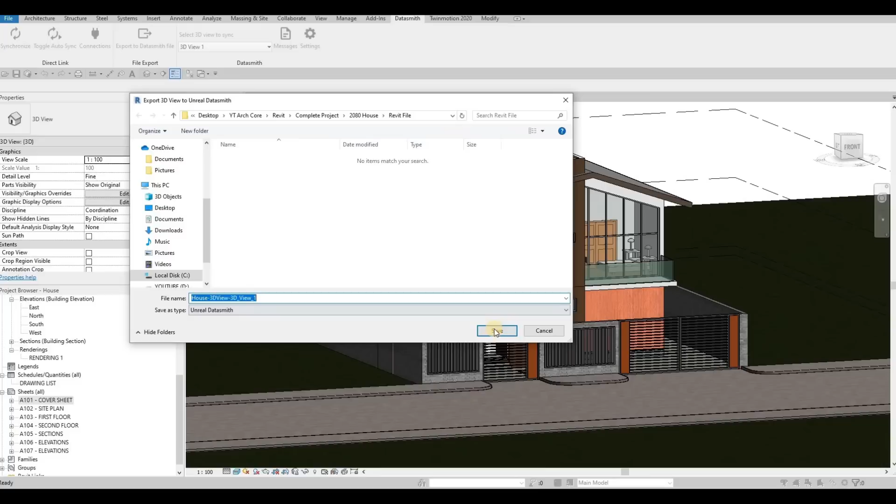Once you do, we're going to go to the Twinmotion program. I already have it open, so I don't need to wait for it, and I'll just close this one. What I do is delete the starting cylinder and the sphere, and leave the starting ground, but delete everything else.

After that, we go to import, and we need to go to the location where we saved our Datasmith file. So I went here, did Control-C, then went to import, selected the plus sign, left it in geometry, clicked open, did Control-V on the file name, went to the correct location, clicked open, and then clicked import afterward.

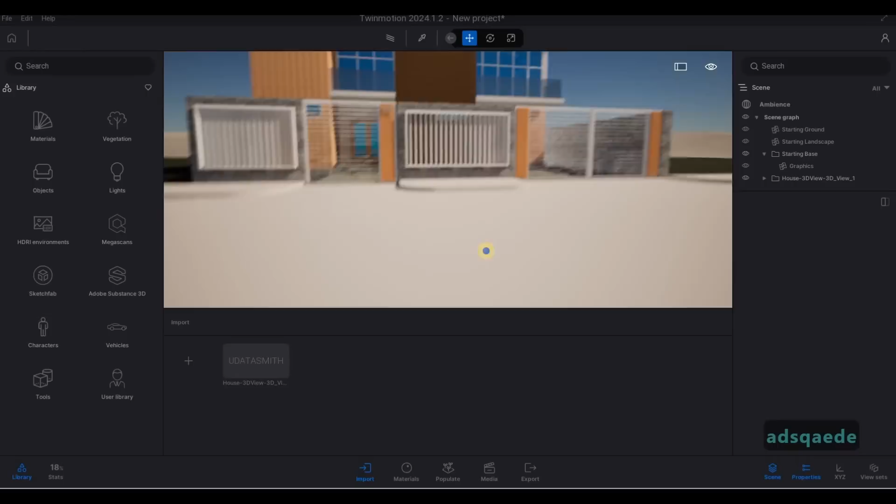It will import our model, and as you can see, just press OK. Let's see how this one looks. We want to make sure nothing is overlapping and everything is showing up properly, especially the base. For example, if it's above, it will start blinking because it's overlapping this. So we're just going to undo this and leave it like this.

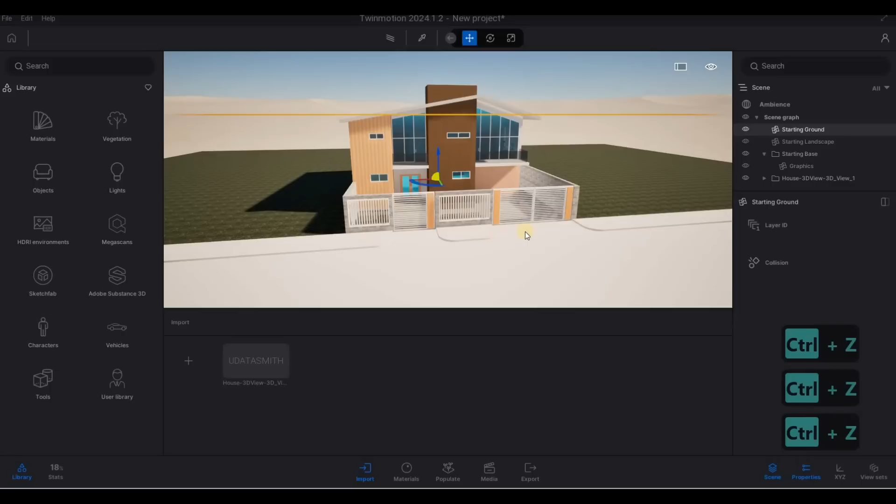So we got this one done, and we have to save it first so we already have it saved. Make sure to sign in as well. I'm already signed in, so that's good. I just need to save as, save it to the proper location, and I'm going to put it in a folder called HOUSE, all caps. Click save, and since you're already signed in, we'll be able to use Sketchfab, Megascans, and all that already.

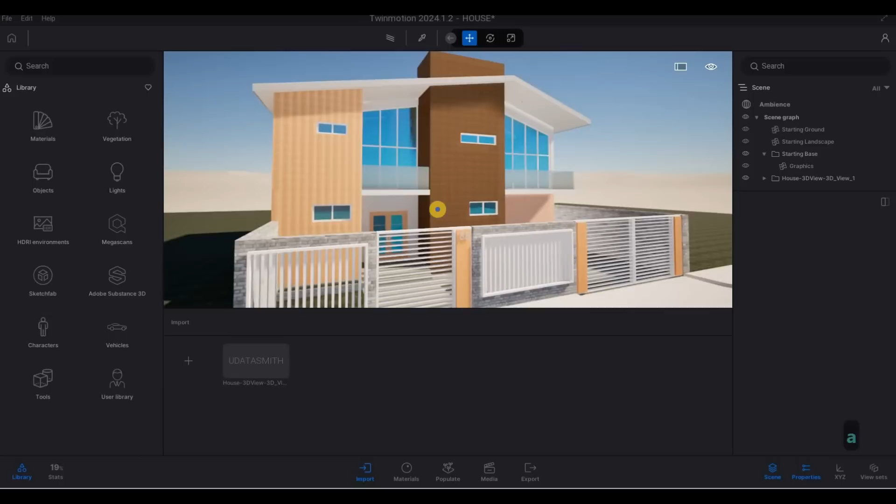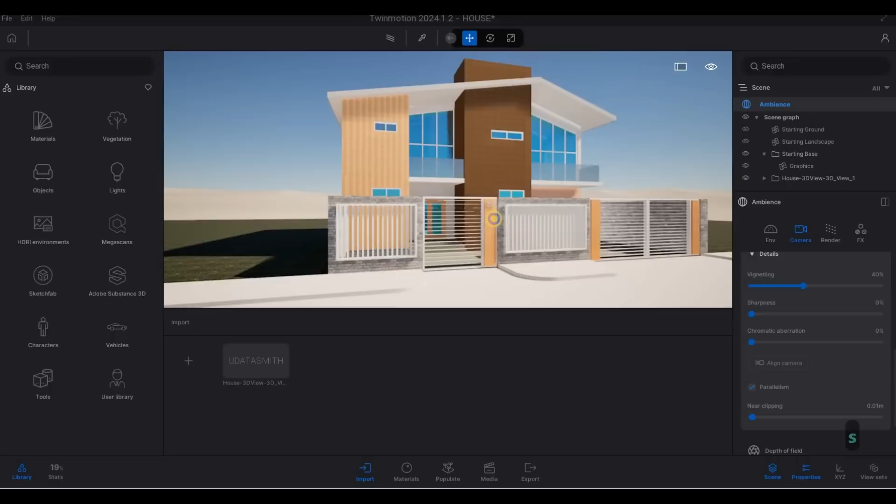Now click on ambience, then go to camera. This is very important that we do this. Go to local exposure, and look for details, then we need to check this parallelism. Click here so we're always vertically aligned and not tilting, and then everything looks much better.

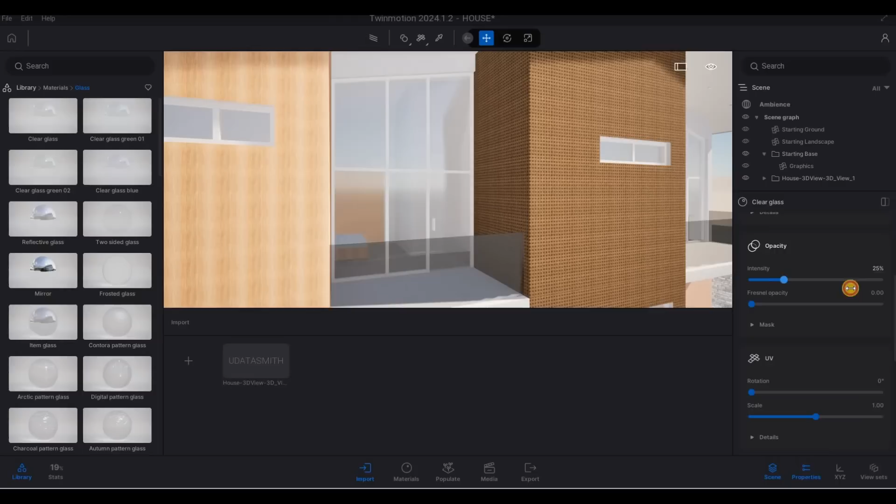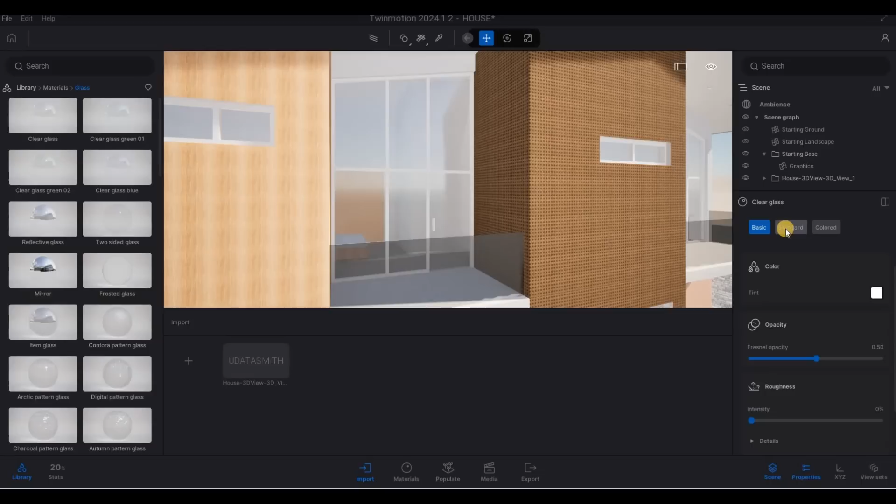Now we can add in materials, and one thing I do first is the clear glass. I'm going to set this one as clear glass, basically increasing the opacity. I'll put this one around maybe 25, and this one around 0.50. That's good right there. Then the tint, just basic or standard, either way works. So standard, and I'm going to make this one still visible there, but we'll change that later once we set up the rendering.

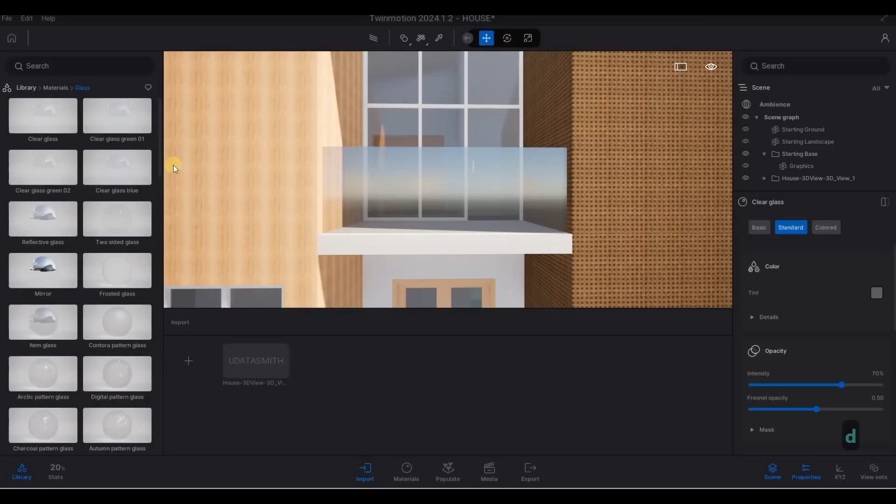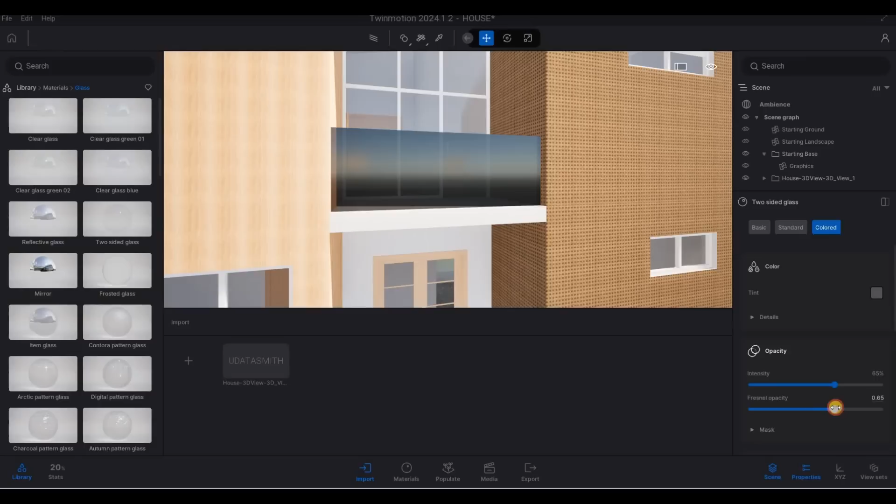Then also go to ambience. Actually, for this one, we need to set the clear glass again. I'm going to make this one two-sided, and make it a little bit colored because we need a separation of intensity for this one. So I'm going to use this one somewhat different, so at least there's some separation of lightness there.

After that, go to materials, and the stone that I'm going to use here is my favorite one, this one, and I'm going to increase the scale.

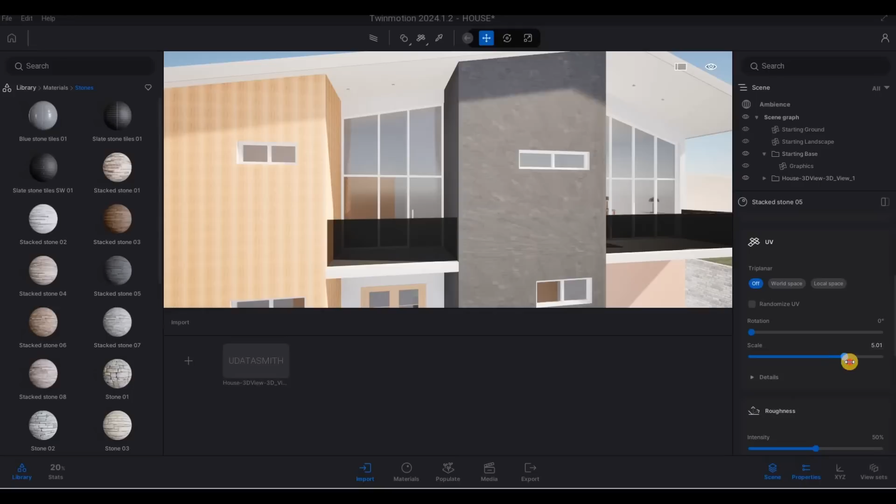So I'm happy with that, I'm just gonna leave it like that for now. If I want to change it, I'll change it later on, but for now that looks much better.

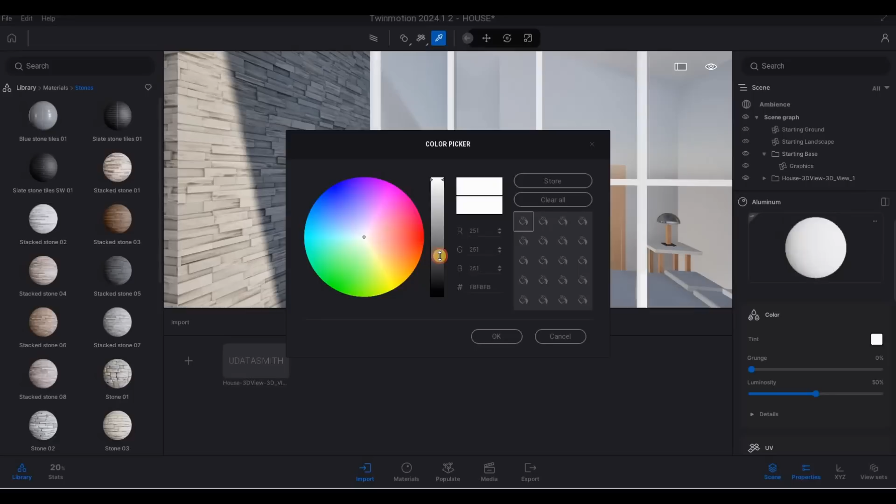For the mullion, I'm going to pick material and select that material right there. It's already aluminum, and what I'm gonna do is change it to black. You want to increase the metalness if it's not already high. I'm gonna put it at 80. So that's good right there.

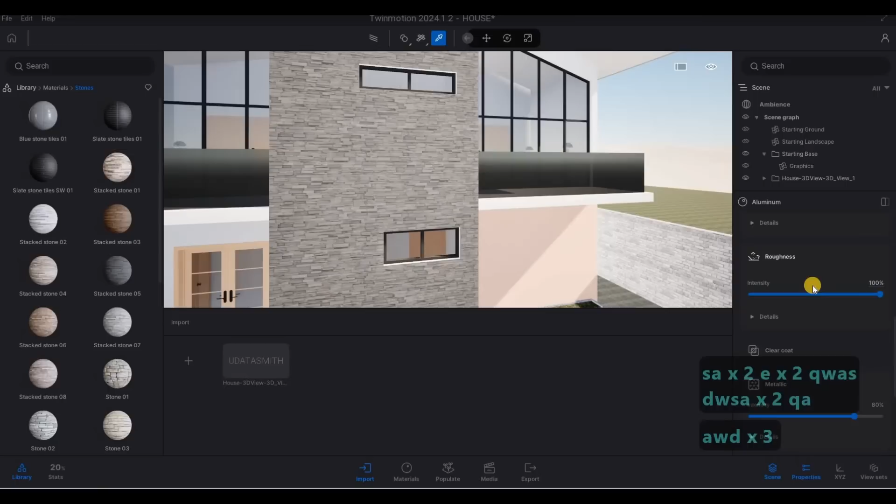Black. And then the next thing we're gonna do is set maybe the materials for this one.

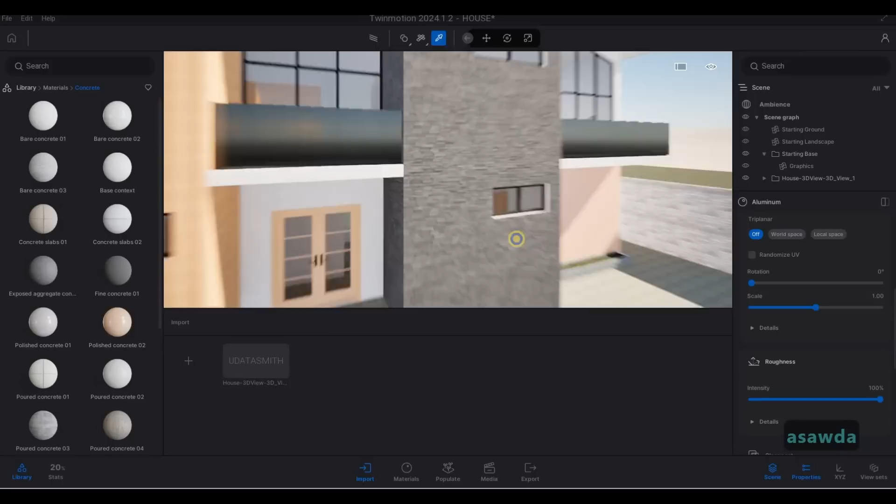So go to materials. For the concrete, it's either I'm gonna leave this one white, or set it like that. Either way I'm gonna change that, but I forgot I'm going to put this one as aluminum as well, so it's consistent with color.

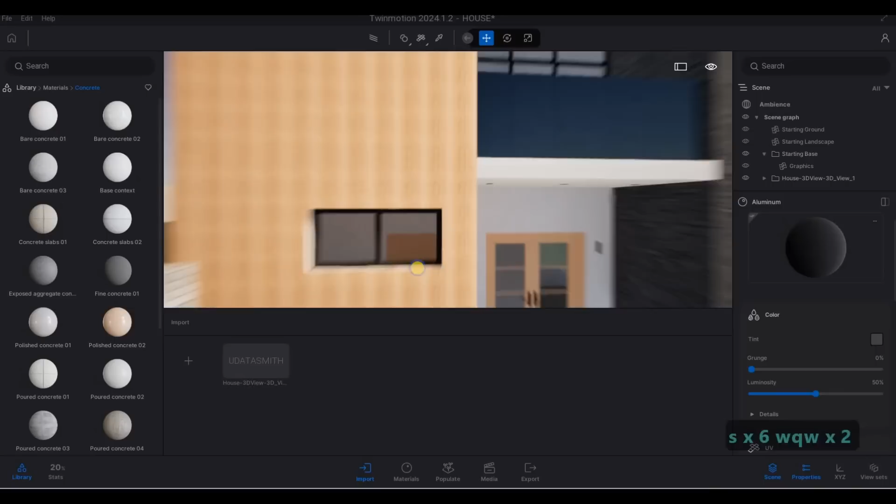And then this one as well, the casing of the light there. And then why not put this one right here, and then aluminum here as well for the number. So I'm good with that.

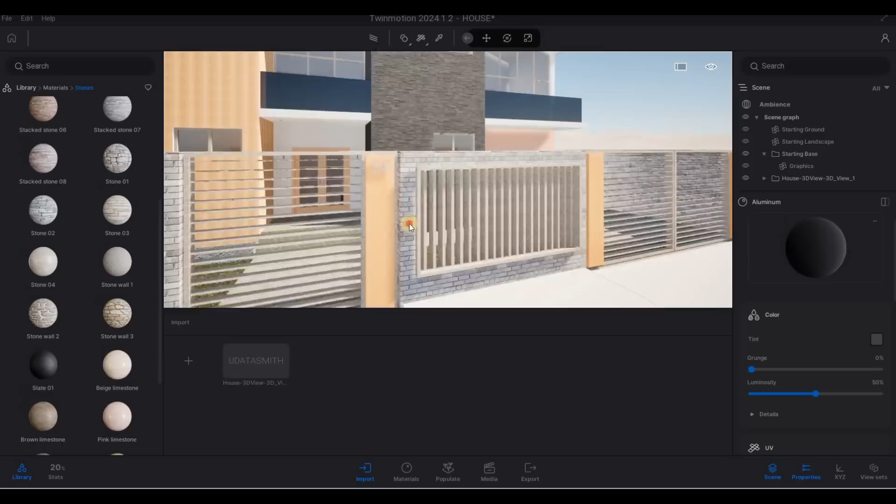I want to change the border wall to something stone again. I'm gonna use this, and then increase the scale.

Actually, this stone looks much better as well. It's better here as well. So either way, we can add that one or here.

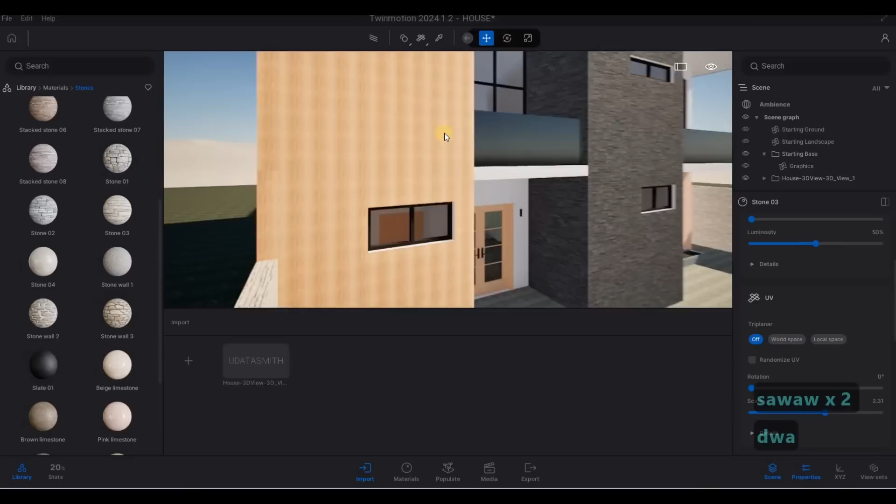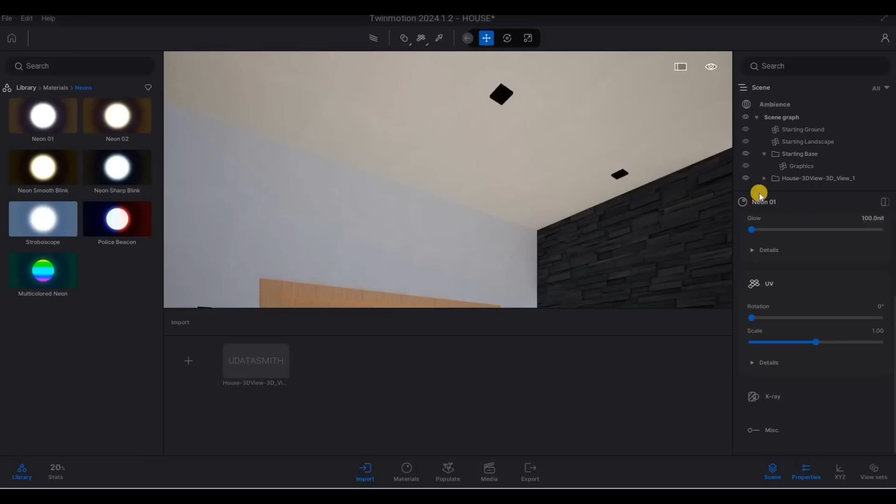And then it's either we put all, we're just gonna leave this one white, and then I want the neon now to show. So here I'm going to set this one up, and I want it to glow, and it's not glowing. There's a reason for that.

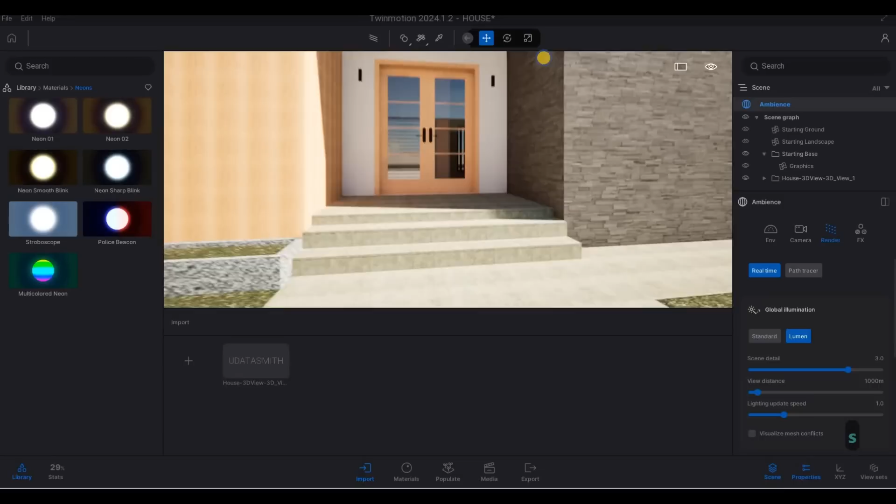So what I want to do is go to ambient, go to rendering. I'm gonna use Lumen, and then of course path tracer later on. And then here we need the Lumen to glow.

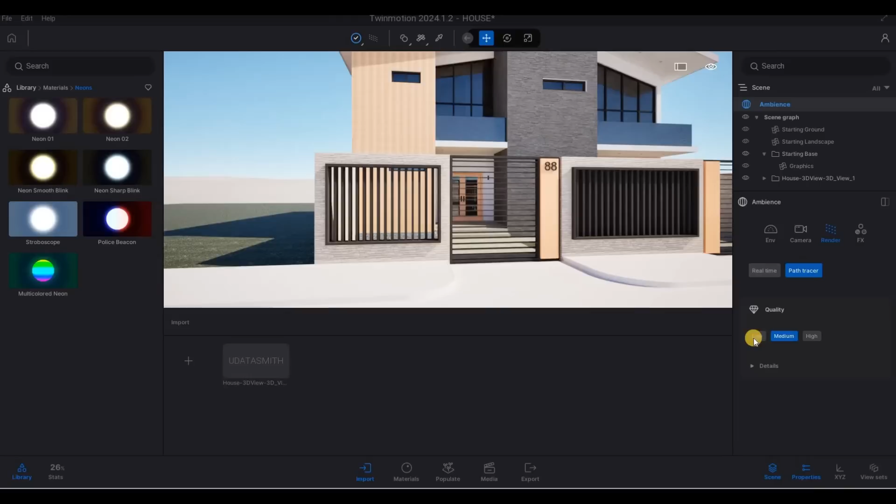So I'm just going to leave this one around like that, and once we're rendering it, we're gonna see how it looks, if it's glowing too much or too low. So depending on that, we're gonna put the path tracer low for now, so that once we render, we'll be able to see.

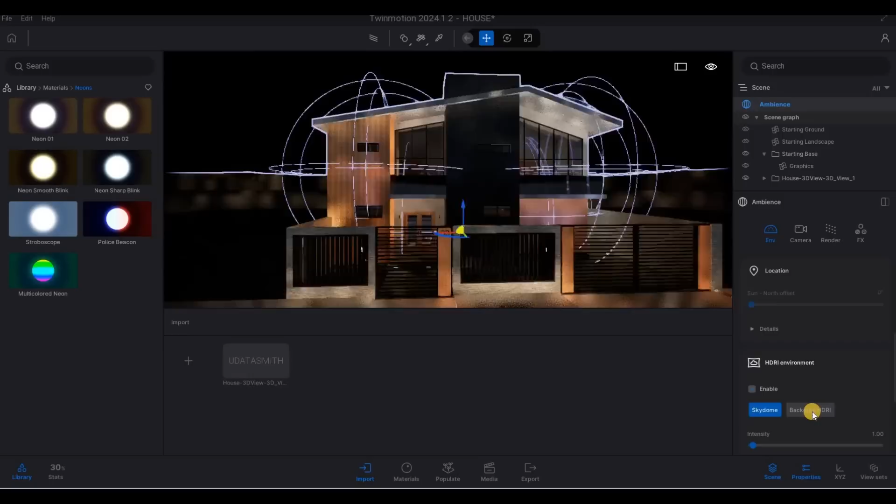And then why not go here, go to ambient again, and click on the environment, because we're going to use HDRI. Click enable and then backdrop HDRI. And then here we can change the HDRI and choose different ones. So ambient, environment, and we could drop it here once selected.

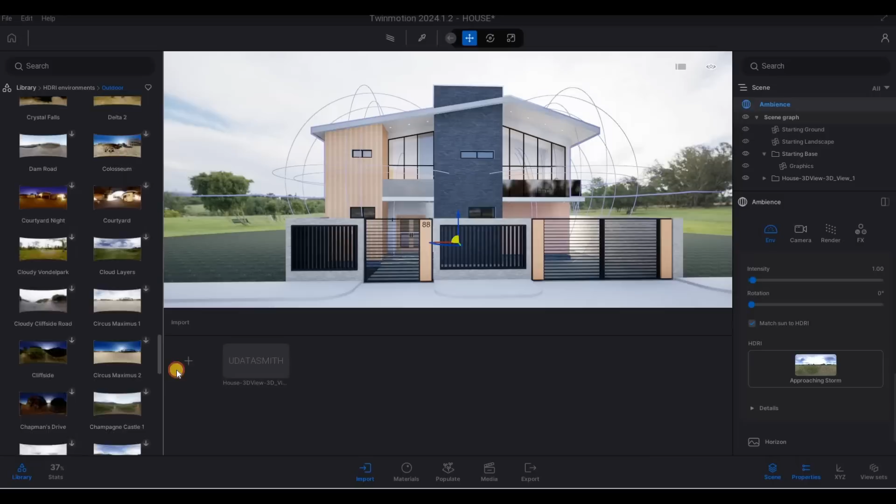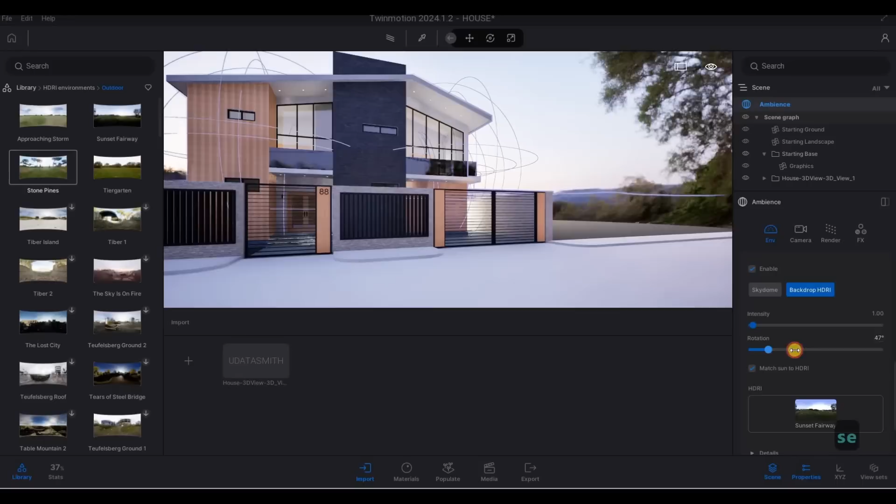I'm looking for a snowy background. I haven't seen it, so probably I'm not checking too much. But here, maybe I'll change this one right here like that. And then here you can change the rotation. Maybe this background is nice enough.

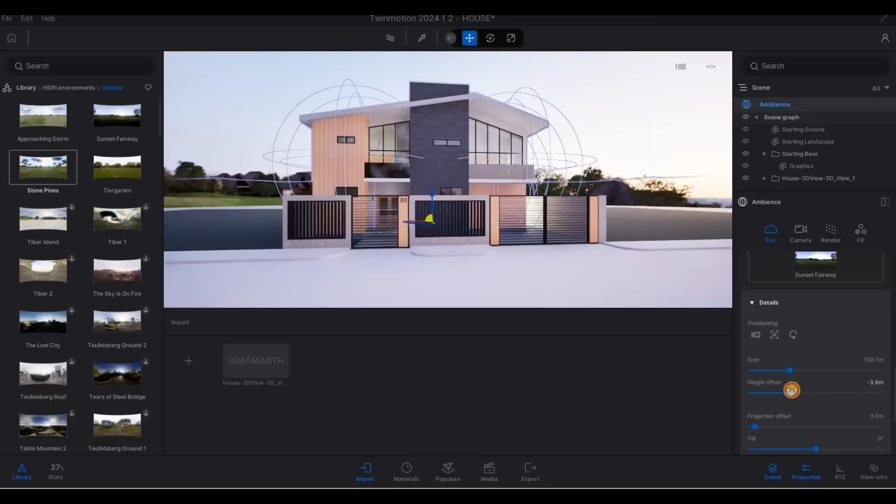Of course, we're gonna add in the rotation, and then go to detail, and you can put in size if you want to make it bigger a bit, and then the height offset so you can pull it down. It's not visible too much at the back. You have those snippets there.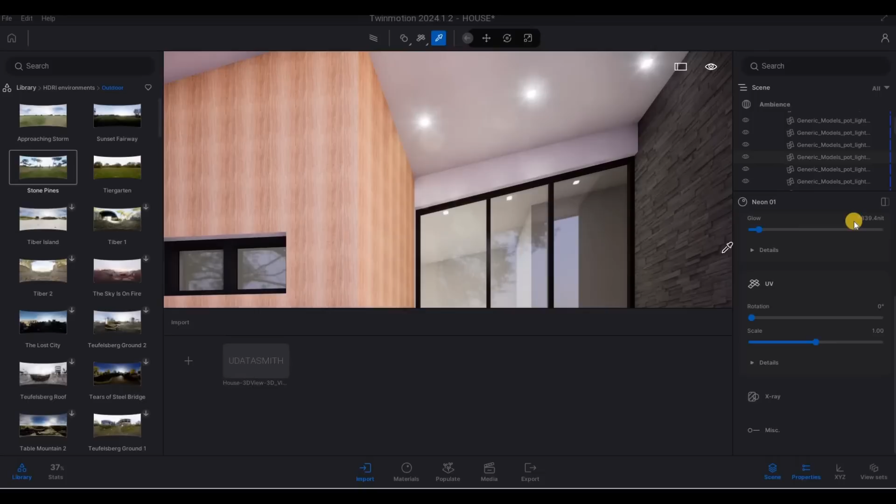And then let's see. So it's glowing already, but it's too much glow. That's why I have to put it in Lumen and then in this background so that we could see how it glows. So I'm gonna glow it on 10 only to see how it looks.

Here, for this one, we need to check the two-sided metallicness. Not too much. The opacity, we're gonna lower it down.

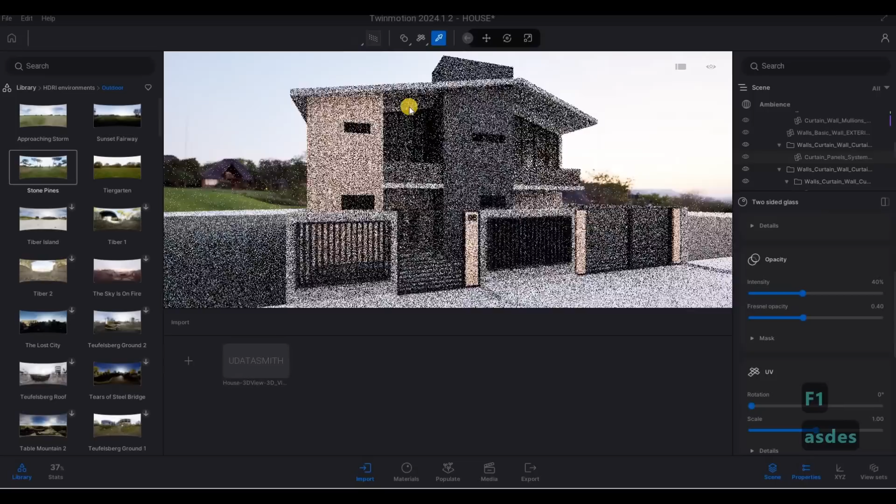So I think that's good enough, and then we can try this one and see how it bounces. Maybe a little bit lower. And then see it again. Looks good enough, but okay. So we could deal with that later on.

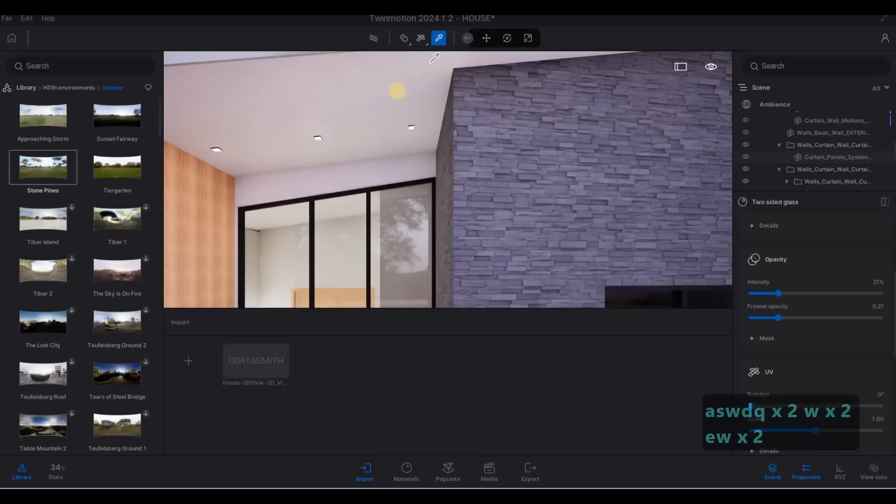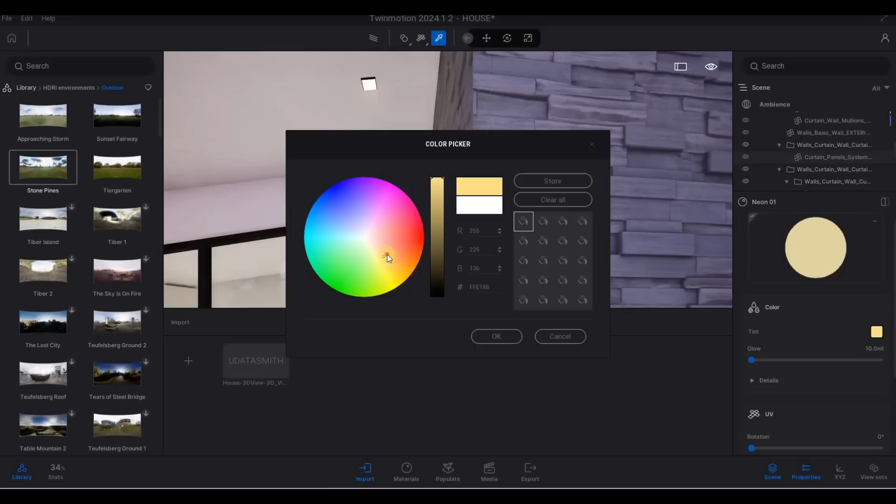And then I want to change the type of glow, or the color of glow here. I want it to be yellowish. Yellowish orange. Okay, so like that.

I'm happy with that. And then here we need to select this, and then all the light fixtures, because it's going to glow too much if we don't take care of that. So I'm just selecting all of those so that we could set the temperature to around 3200K.

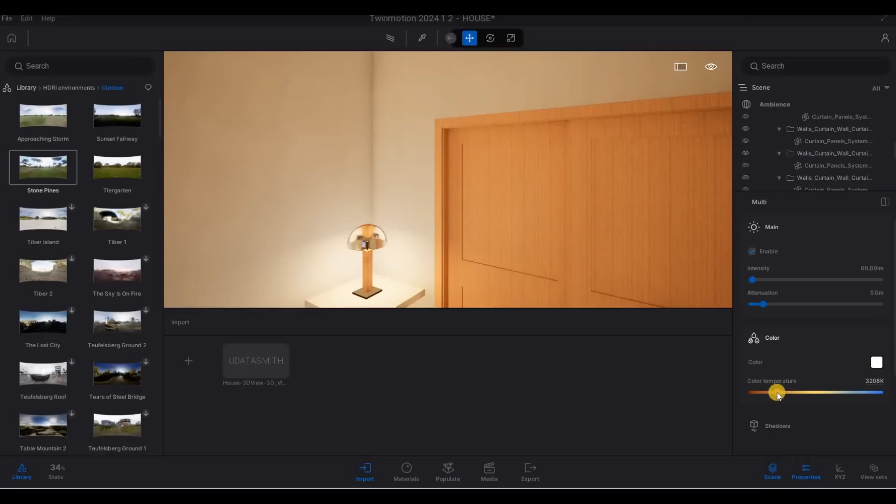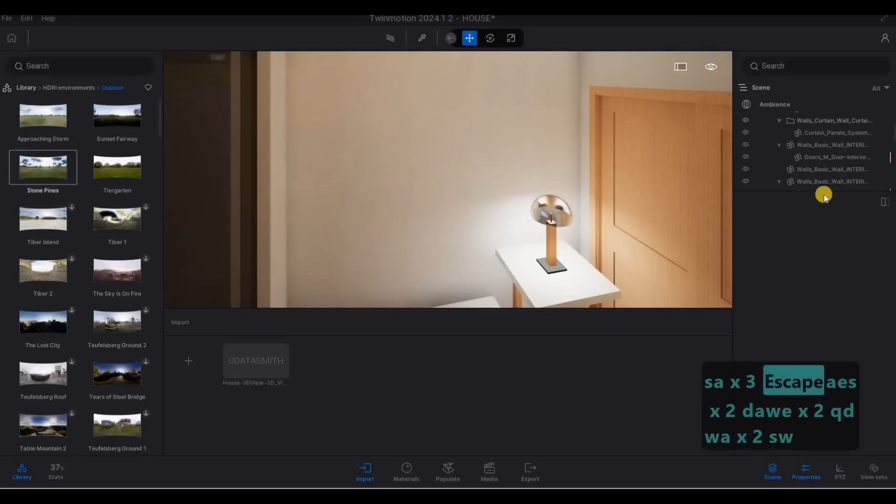Let's put it at 3000, that's good enough. You can see how that one affects everything. We need to look into this as well. 3,000. Then press OK, I think that's good enough there.

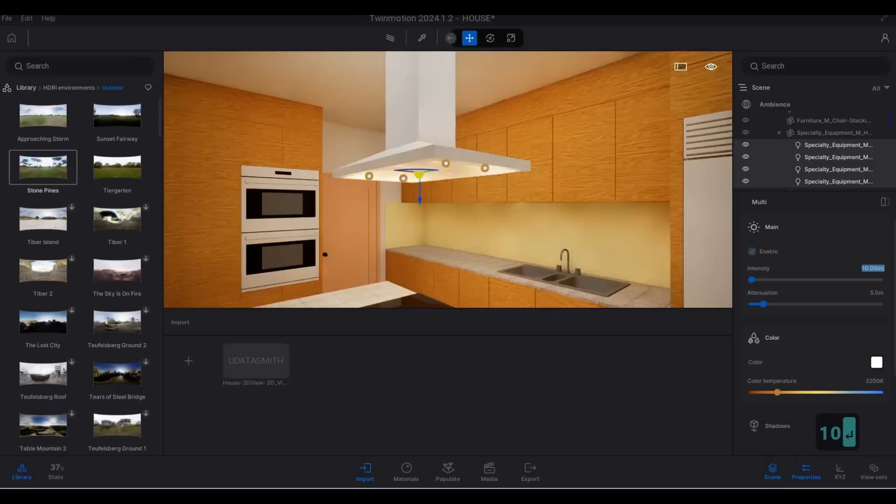Maybe here we need to lower it down, it's glowing too much. 32, and then the intensity to lower it down, maybe 10 is good enough. Not sure, but we're going to check that one. As you can see, it's not glowing as much anymore, not too much though, so we're good with that.

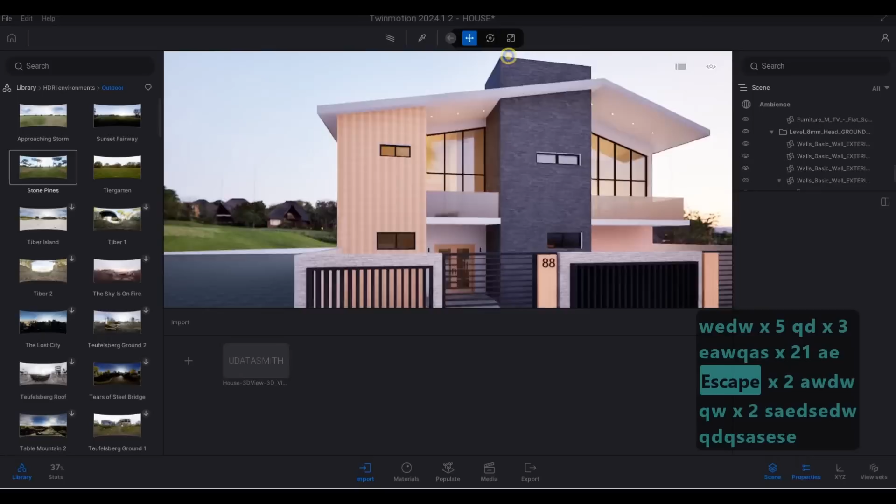Having that glow right there gives it a better look. I'm going to select this again and put this one to black, so aluminum for that. Then for the material here, we're gonna change it to the roof material.

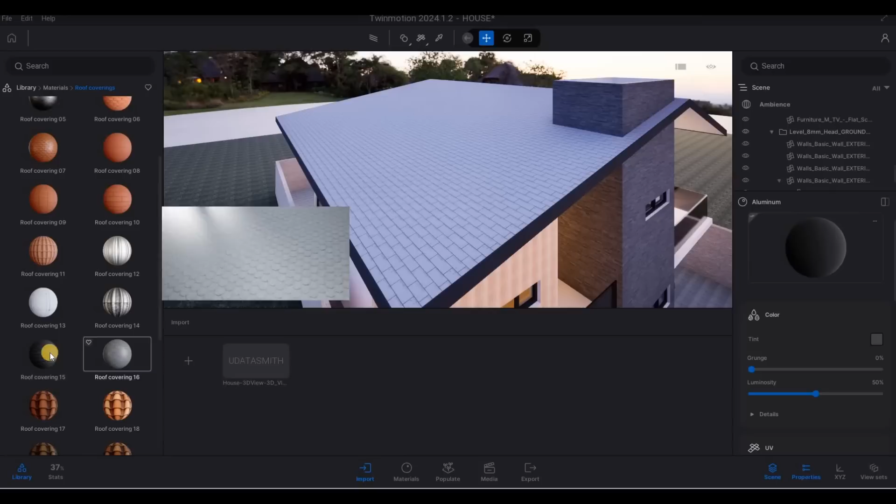I'm just gonna use this and then increase the scale a bit so it looks like asphalt shingles, and that's good enough for me.

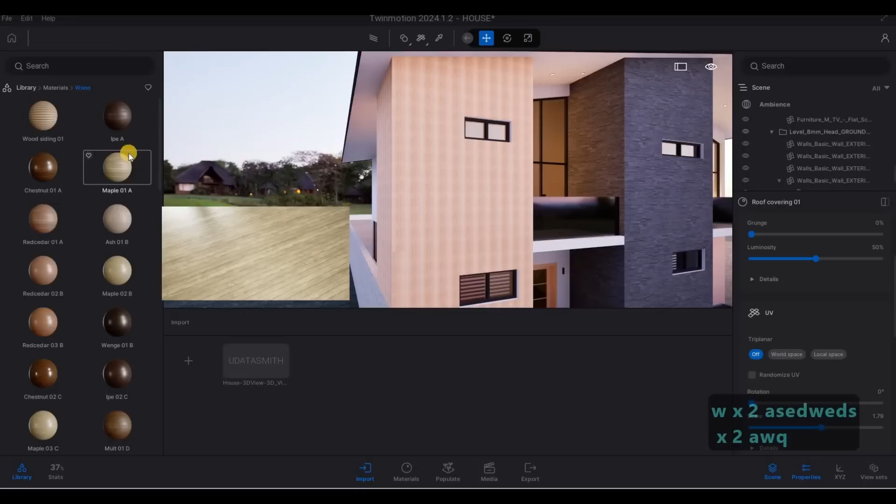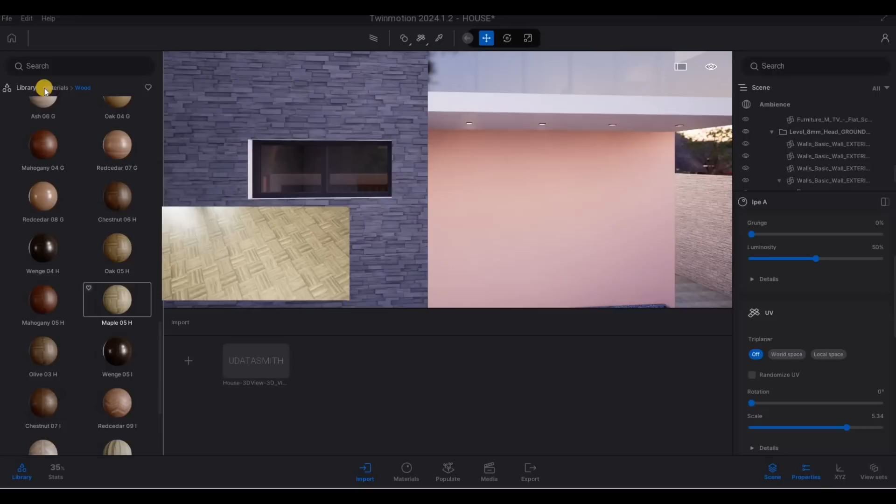For the materials here, I'm gonna use this and increase the scale so that the paneling is much more visible. Then here, another different wood material, or maybe we could change it a bit.

So here in Megascan surfaces, we can put concrete. Yeah, let's put concrete material.

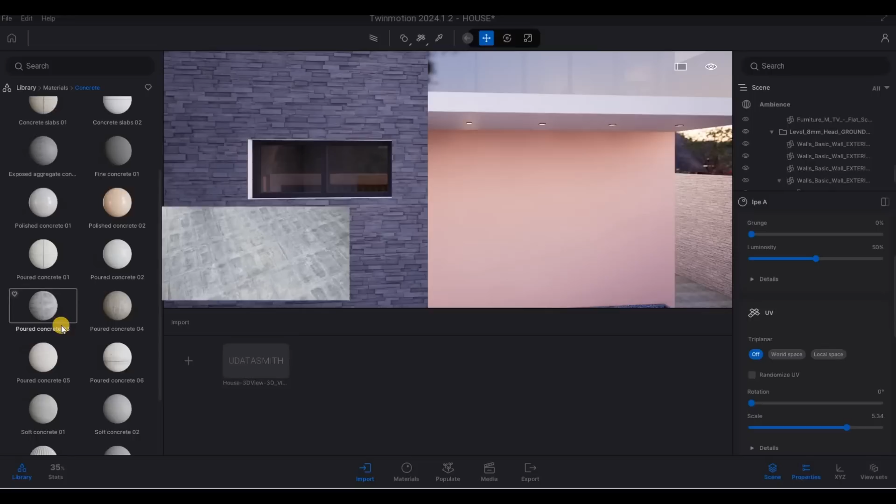Let's look at this one, poured concrete material right there. How about this one, polished?

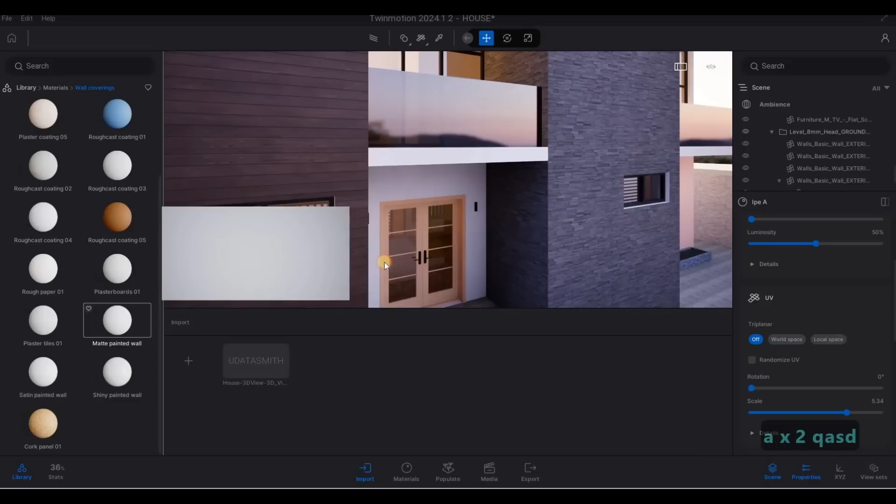Instead of concrete, I'm going to do the wall covering as matte paint instead. And then here, I'm gonna use the same materials right here, aluminum. So it's much better right there.

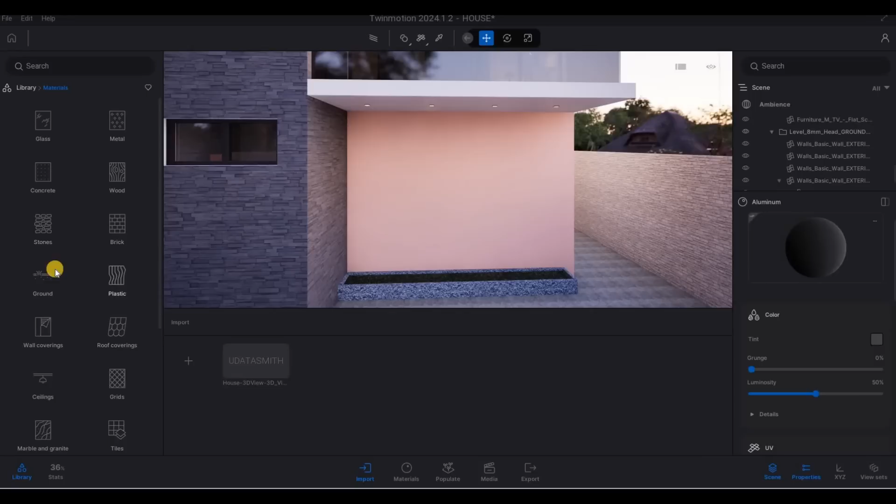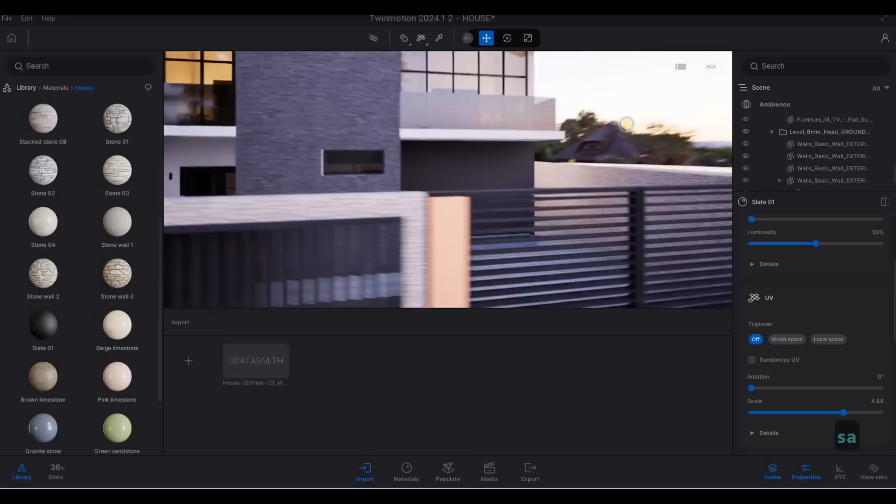So I'm thinking now what kind of stone we can use here. I can use slate. Yeah, I could use slate, so slate is good enough for that one.

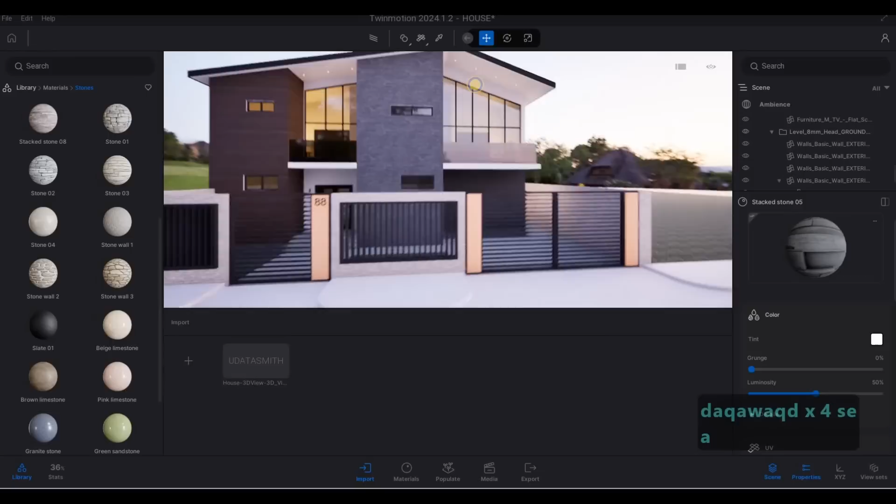And then here, what I want is, I'm gonna use this material and then use this one right here as well, so that's consistent with color.

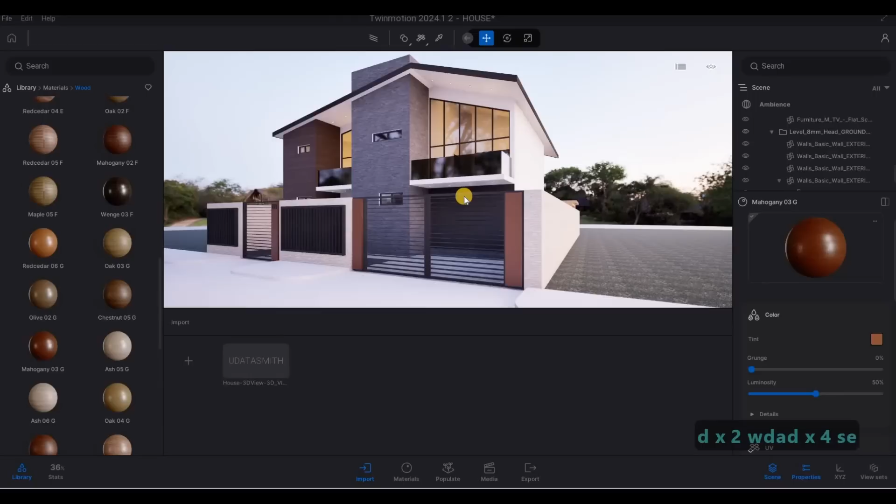And then here, maybe a mahogany for this one right here. So that's looking good right there, even though that's black. That's good enough there.

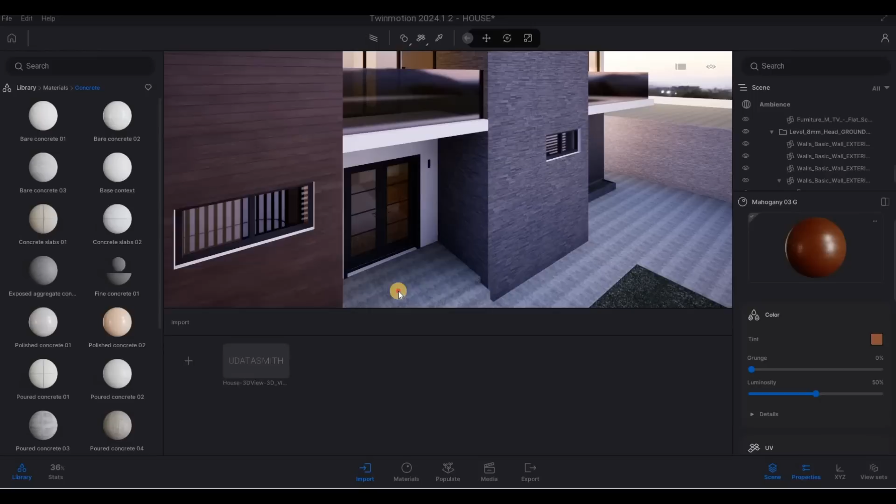And of course we're going to add in more. Then the concretes here, we need to set. I'm gonna put fine concrete, or aggregate exposed concrete. Okay, so that's good right there.

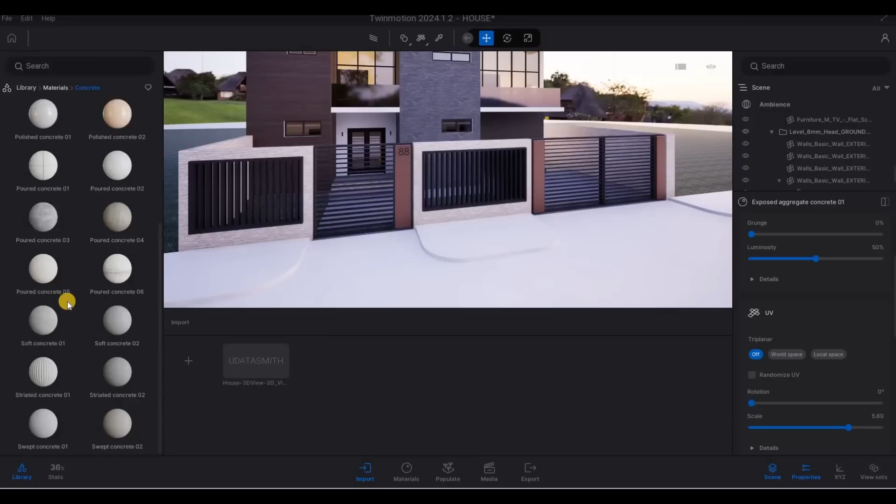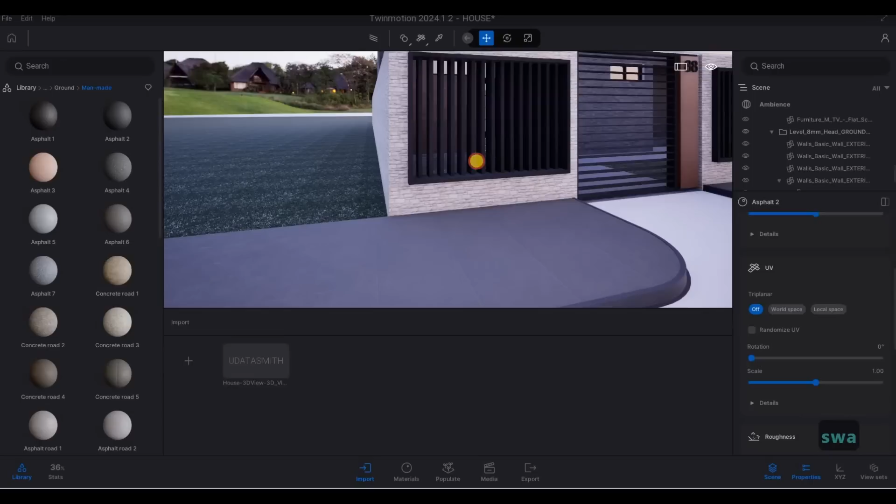And then here, we can go to ground, man-made, and then I'm gonna use this, scale it a bit, and then here we could put in this one right here. I'm gonna select this one again and lower the scale.

And then here we're gonna use slate and scale it a bit. So with that, as you can see, it looks much better. Happy with that part right there.

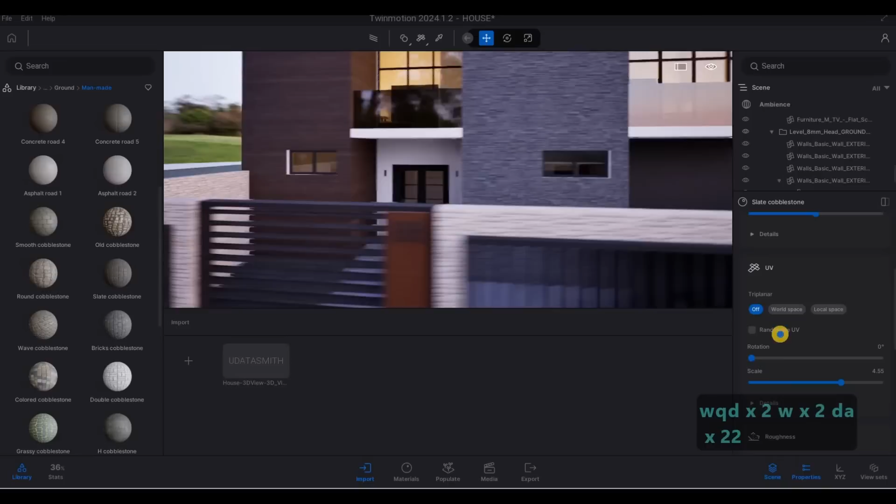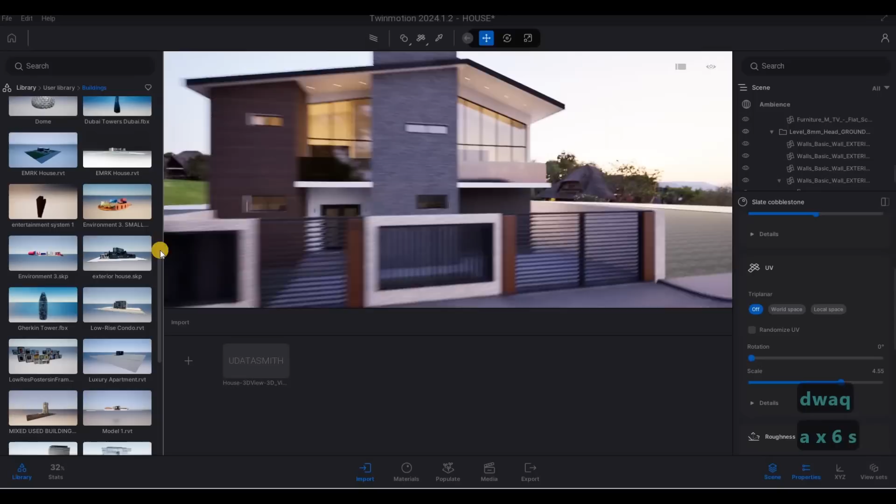And then before we finish, we can go to the user library and click on buildings, and have some projects here that I've done before, and then some that are just for placement or for population. So it's something like this.

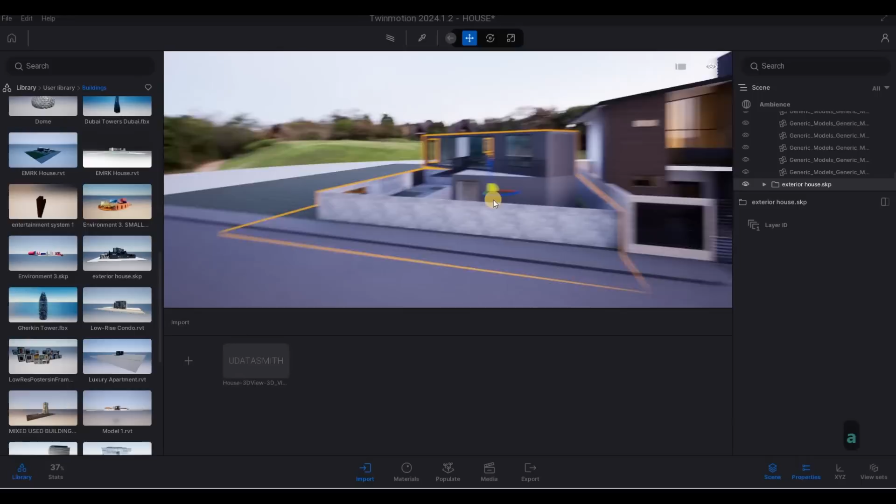I'm just going to use it to populate the area so that it looks complete. So I'm just going to put this one something like that, just beside this one.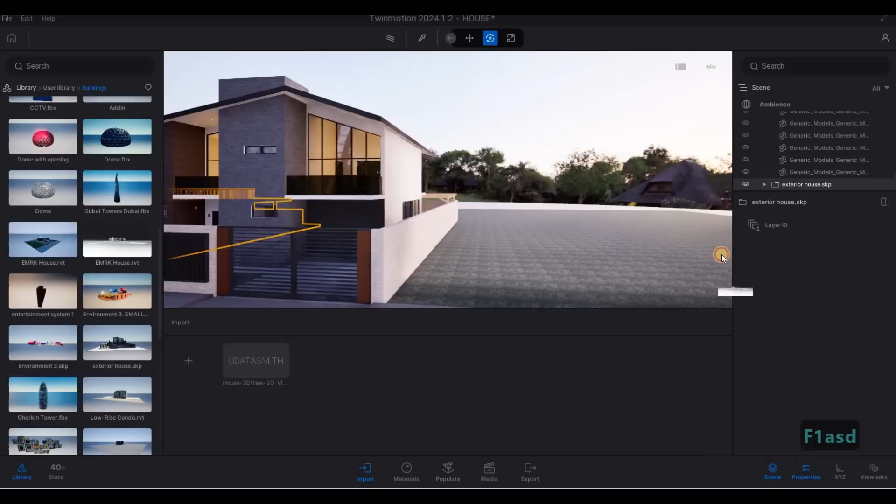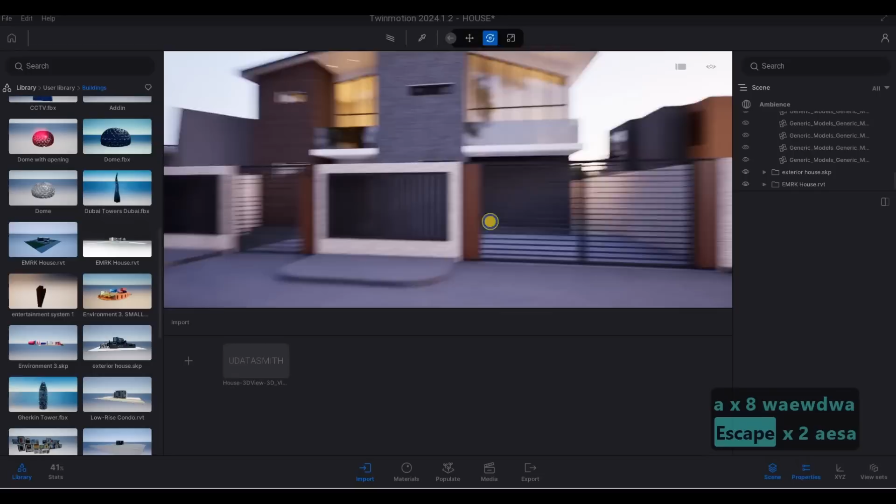So with that, as you can see, we can place this one right there, and then here as well, let's just add this one somewhere right here, and then I'm just going to lower it a bit, click on tab, and then pull it in like that. Having that background right there will give it a lot of information, and it looks populated there.

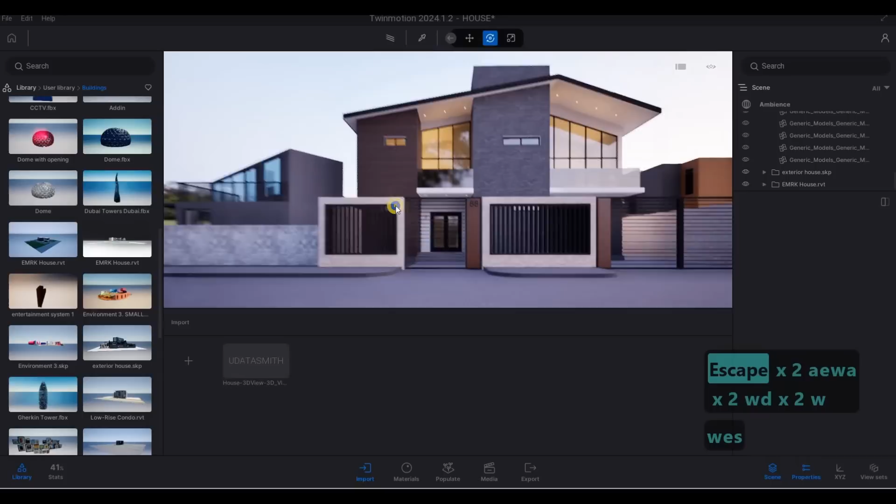We could just move this one a little bit so that we have grass, and then this one as well so that we have grass. We can put it in front. So by that, as you can see, we have our background.

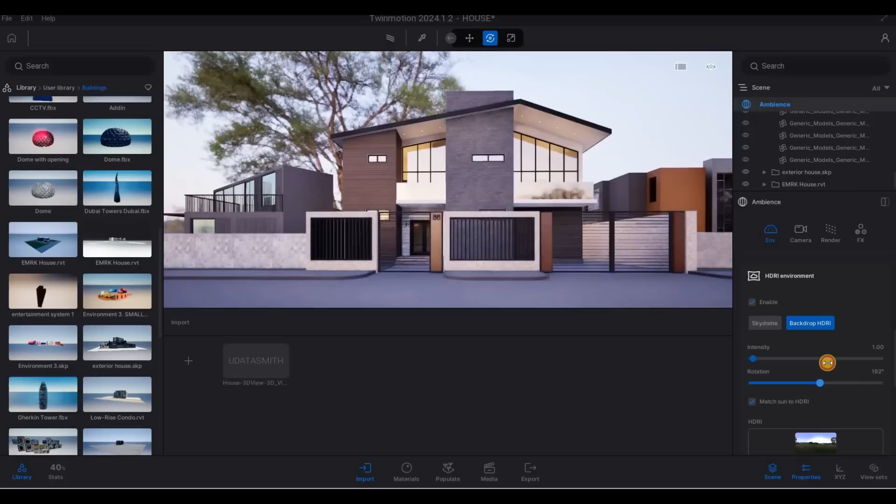You can even go here and maybe rotate it to have a nice background, like that. Of course, we can add more, and then kind of like this one, there's a light showing.

So we're gonna stop here for now and continue in the next video.